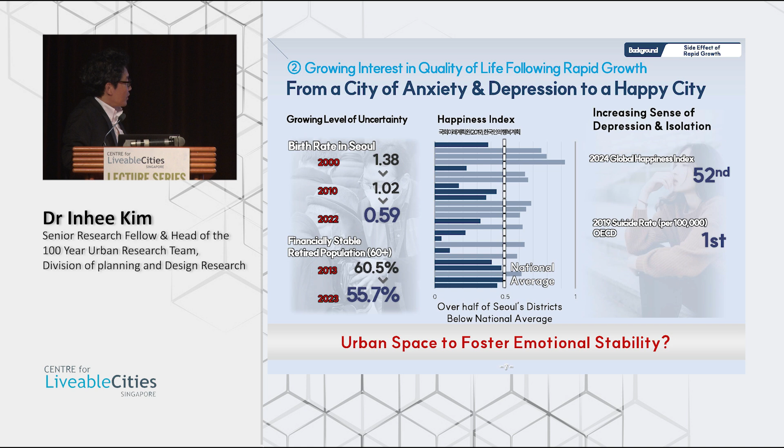The second reason: in the last 100 years, Seoul achieved economic growth and physical improvement, and became one of the global cities. But according to some indicators, since 2019 the suicide rate has been #1 in the world, and this year the Global Happiness Index ranks Seoul 52nd. We are a global city with economic achievement, but the people are not happy. The question is, how can we make citizens happier, and how can we provide space where citizens feel better and have quality of life? That is the second task.

The third reason is globalization, hyper-personalization, and connectivity. Each new generation wants a new lifestyle and wants to enjoy new space. How can we provide for the next generation? That is the third task.

In the last 20 years, when I started making urban master plans for 2020, 2030, 2040, the first step was to learn from advanced cities like Singapore, New York, London, and Tokyo. But after the pandemic, every global city has the same problems and issues, and we don't know what will happen in the future. That's why Seoul also should try to find a solution for ourselves. That is the reason we began the 100-year long-term plan.

We had long-term plans for quality of life and urban competitiveness, but in reality, over the last 50 years we focused on urban development and physical improvement instead of quality of life. We thought quality of life would increase automatically once we achieved global competitiveness, but in fact it didn't happen automatically. That's why we need to change our mindset.

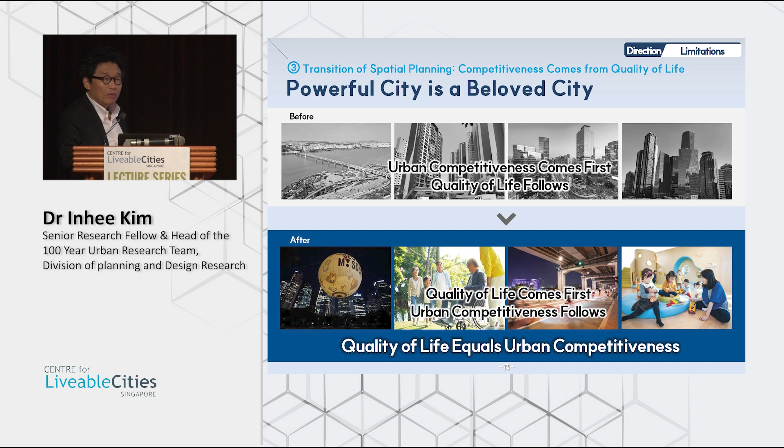Until now, the citizen of Seoul is the people who registered within the Seoul metropolitan boundary. But since 2000, Seoul became bigger and greater. Not only Seoul citizens, but also the people who live outside of Seoul, 8 or 9 million, 40% of the surrounding area, work and study and shop in Seoul metropolitan government. They belong to Seoul metropolitan government, and also the visitors. So that's why we need a new definition of Seoul.

At least, if you as a visitor stay only 1 day in Seoul, you should be considered a Seoul citizen. We need more flexible and inclusive population policies. That is the changing of the citizen.

And second, we didn't have any definition about quality of life. From now on, what is the new quality of life for citizens of Seoul? We should give more space for a generous and relaxed life, and maybe some exciting environment for the citizen. That is the new change idea of 100 years.

In the last 15 years, I had a lot of innovative ideas from citizens, from professionals, from administrators, but almost all the innovative ideas were rejected because of time. It takes a very long time. Because nowadays, the Seoul metropolitan government focuses on the 4-year mayor's period, and sometimes the project extends beyond 4 years, so it gets rejected.

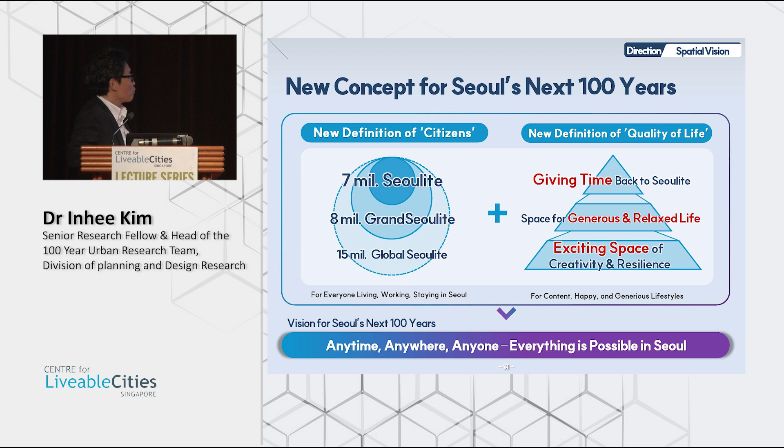Also some ideas that are not within the Seoul metropolitan government, but outside of Seoul, are also rejected because of the system. It's realistic to see it that way, but for our next generation, we need more bold, more creative ideas.

That is the background of the 100-year plan. We try to make a more bold proposal to break our limits of time, space, and systems. That is the background of the 100-year plan.

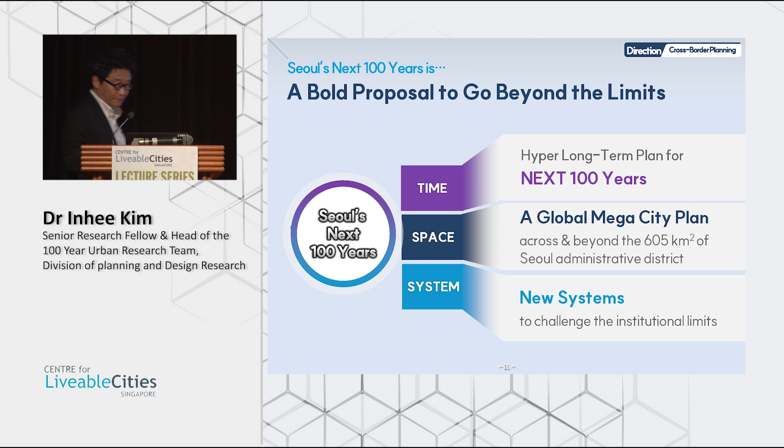So that is our vision house and vision. Next 100 years, city for all, anytime, anywhere, anyone. You can do everything, everything possible in Seoul. That is our vision for the long term.

And then we need 3 goals: nature and human being oriented, and hyperconnectivity. These are the 3 goals, and I will present them briefly. The first one is city in nature.

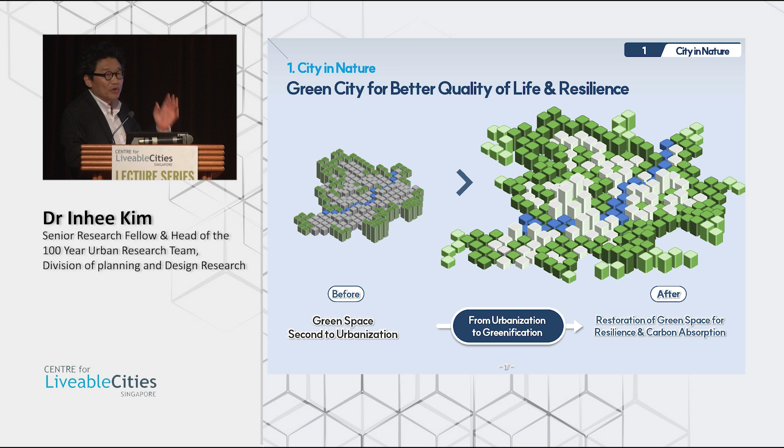In the last 100 years, the environment, the green area, was sacrificed for urbanization. From now on, from urbanization to greenification. How can we realize it? Currently we have about 43% green area of the whole city of Seoul.

From now on, we try to reinvent and redevelop the old infrastructure and old residential areas. Then we can create additional green area, about 47 or 50%. Finally, our goal is about 85 to 86% of the whole city should be green area. That is the first goal.

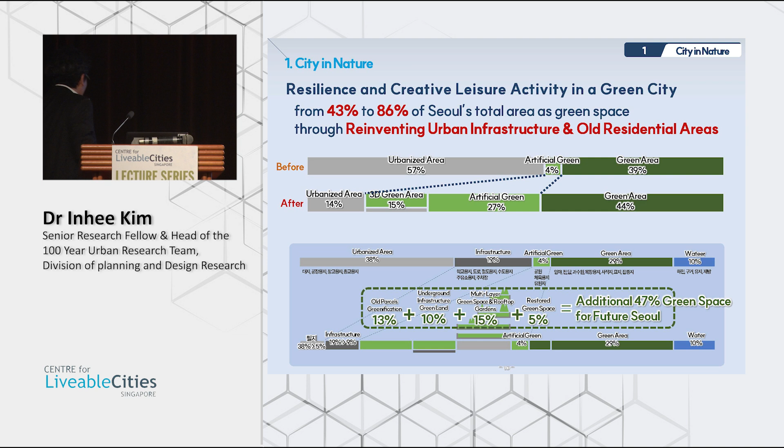And second, Seoul citizens are suffering because of long commute distances, over 30 kilometers, and long commute times, 60 or 90 minutes. We try to change this within micro Seoul. If you imagine working, living, and enjoying where you live within a 15-minute walkable environment, then it's good for quality of life.

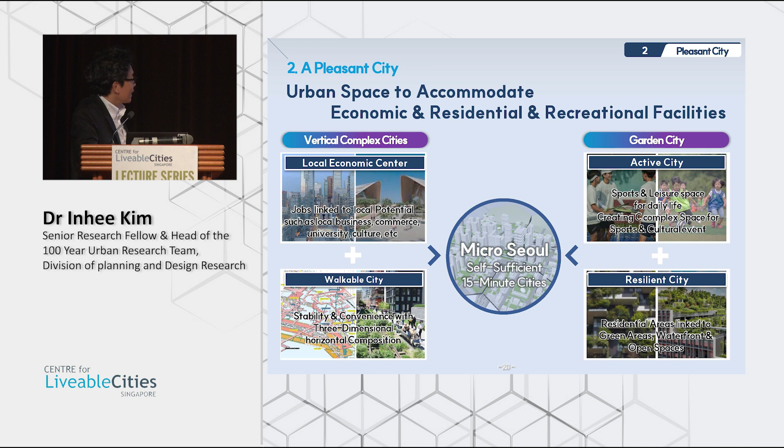That is the idea of micro Seoul. Micro Seoul consists of residential, recreational, and services, and of course the important thing is economic facilities. How can we create economic facilities? That is the most important thing. Anyway, that is the idea of micro Seoul.

And third is connectivity. Nature and micro Seoul are good for daily life, good for citizens. But Seoul is a global city, the capital city. We need more competitiveness and sustainability. That's why we need to connect not only within a neighborhood, but also with major cities in Seoul and in global cities.

We try to improve it: a 15-minute slow and walkable environment, 60 minutes within the country, and between 30 and 45 minutes to the airport to reach global mega cities. That is hyperconnectivity.

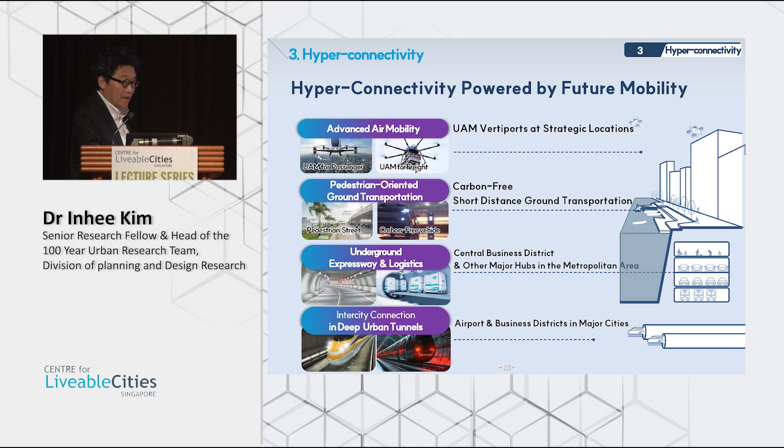We need new hyperconnectivity mobility stations in the air and pedestrian areas. We have a second layer underground, under the expressway and logistics. And under a 40-meter deep tunnel, we have high-speed rail between regional cores. That was the idea, and now just the strategy—how can we realize it?

First, on the nature, the 6 strategic points - this lesson is from Singapore. So the first one is waterfront conversion, restoration of the creeks, rivers and streams.

In Seoul, over 15 or 20% consists of waterfront, but the waterways were covered and used as parks, roads, etc. We remember the most innovative project in 21st century Seoul, the Cheonggyecheon Restoration Project, and we can upgrade further based on that project.

And in all of these places, once the streams and creeks are recovered, we have a better quality of life, and also a local economy boost through this restoration. That is the first one.

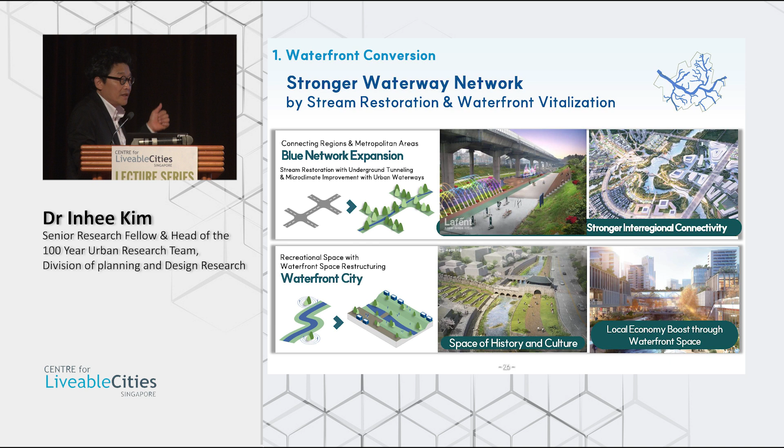15% of Seoul's urbanized area became a green area, and we have over 12 city hubs, city cores. Today I saw the exhibition in Singapore - we also have 10 or 12 city hub projects. That is the advanced lesson from Singapore.

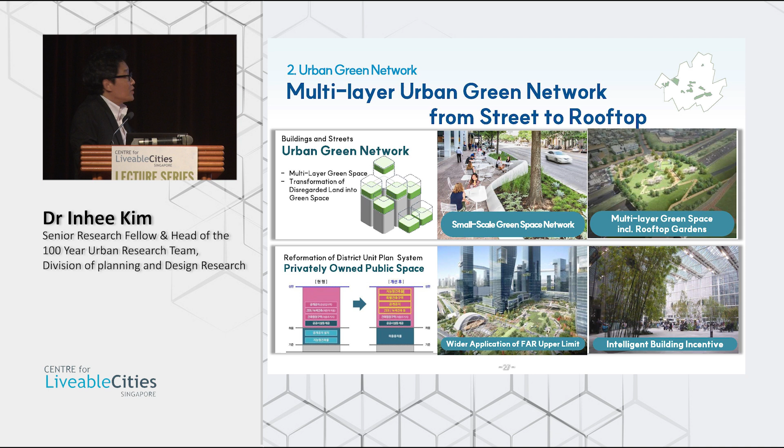And if we develop the city hub, we try to give some 3-dimensional vertical green areas for the districts.

It's important that 35% of urbanized area consists of low-rise residential area, developed in the 1970s. At that time, we didn't have any open places or green spaces. But nowadays, over 60 years later, as it gets older, we should try to renovate this area.

Then we can give, instead of 5 or 10%, over 50% - we create new green areas, like this one. And we have big mega structures: railways, urban expressways, elevated ways, and riverside ways.

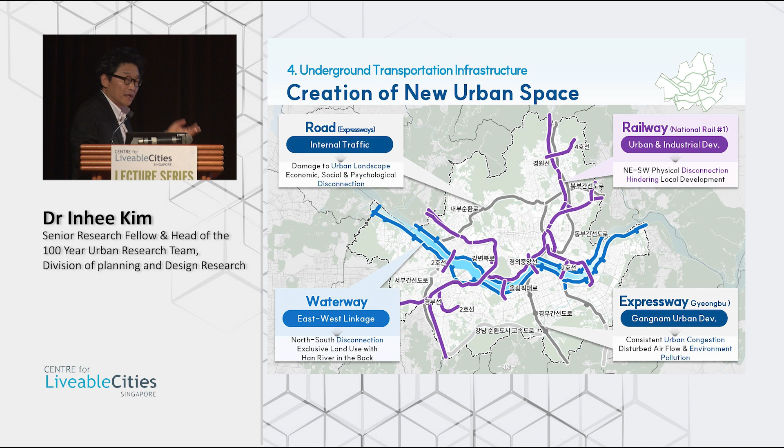All of this big mega infrastructure is getting older, and we can try to put it underground and rearrange this area. Then we create over 20% of our urbanized area as new green, public, and other areas.

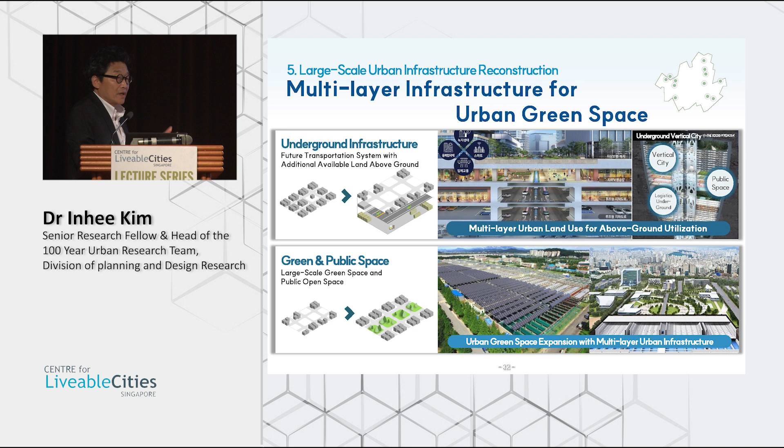Before and after - we also have big mega infrastructure like water storage depots or railway depots. They can also be restructured into urban green areas.

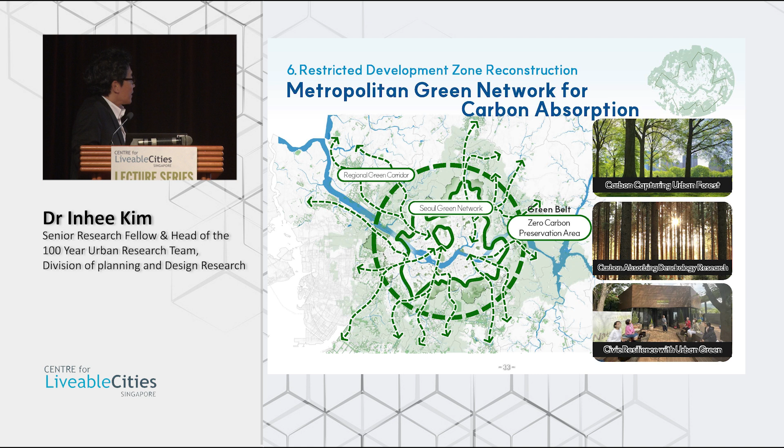Okay, the second point - this is today's issue, micro Seoul. We should change our planning paradigm from facility and function-oriented to activity-oriented and lifestyle-oriented.

That is the idea of self-sufficient, compact micro-cities. Until now, we've focused on the city's soul. We designated the inner city facilities and infrastructure, thinking it would increase global competitiveness and quality of life. But in fact, the quality of life is not realistic. That's why we changed our idea from efficiency-oriented to daily-life, activity-oriented, human-oriented.

As you see here, no matter where you live, you can access work, education, and all daily services within 15 minutes. That could create a good environment for citizens. That is our idea.

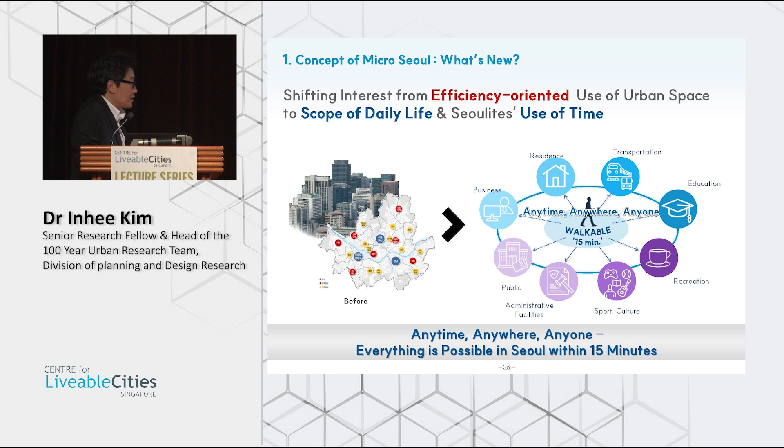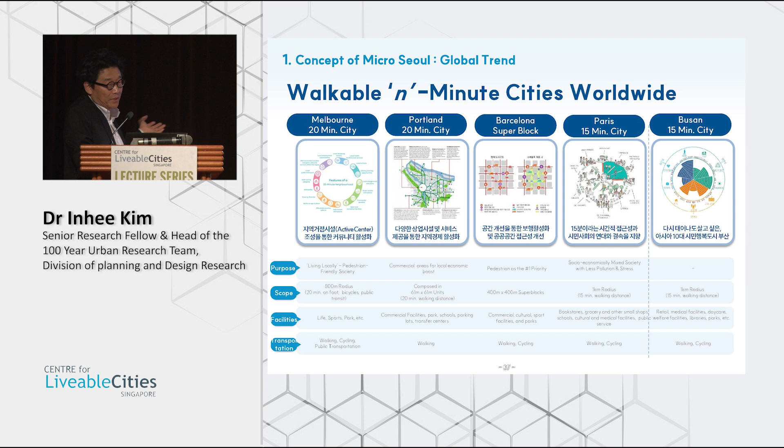And this is not our own creative idea for Seoul. After the pandemic, this became a global trend. Every global city - Melbourne, Portland, Barcelona, Paris - the 15-minute city is a global trend.

Also in Seoul, in the 2040 Seoul Master Plan announced last year, we proposed 116 micro self-sufficiency areas. Over the last year, we discussed how realistic these 116 micro Seoul areas were.

And then we figured out there were too many, and it wasn't enough to make a self-sufficiency area. That's why we changed the number of micro Seoul from 100 to 50 micro Seoul.

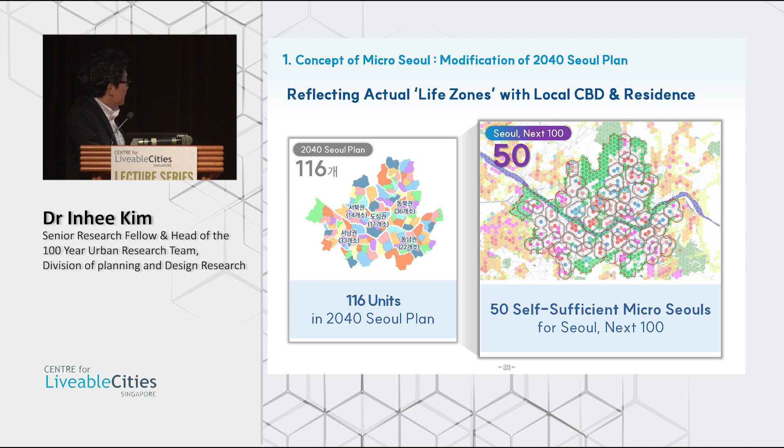How can we analyze it? We divided Seoul into 700 small units, the basic unit with a 1 kilometer diameter, each having basic functions - business core, urban industrial, semi-industrial, commercial, university and R&D, health, administrative, residential, etc. We analyzed land use, density, and facilities across all 700 units.

Then we designated 50 main cores, as you see - that is the 50 main cores of micro Seoul. That is the result of the last year's work. And how can we...

Arrange micro Seoul? As I mentioned, we have 700 units with a 1 kilometer diameter - that is a 15 minute walking distance. We call it 동네 (dongne) in Korean, meaning neighborhood unit, with a population of about 20,000. Each unit has a main function, like residential, cultural, educational, commercial, or business.

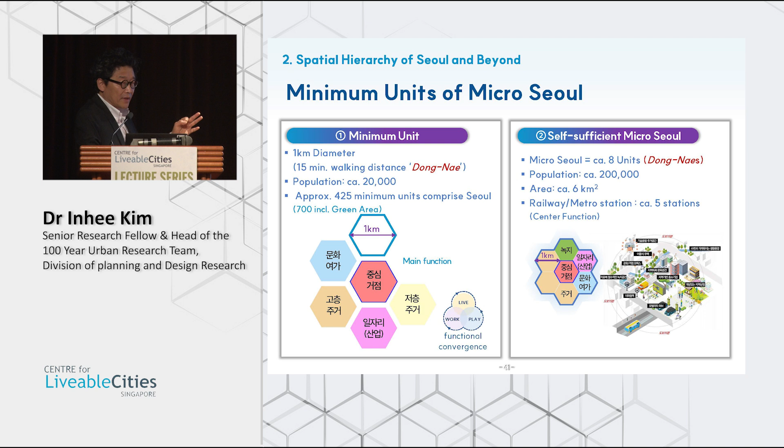About 8 of these minimum units, the 동네, come together to create one micro self-sufficient city - about 8 units, giving a population of 200,000. That population is enough to make a self-sufficient city, with about 4 or 5 city centers, or cores. That is very important - it creates jobs. That is the second level.

And the third level - 50 micro Seouls then come together to form one Seoul metropolitan government, with over 10 million population. But that is not enough.

Because surrounding area, we have 11 surrounding cities with 8 million population. 40% of that 8 million population work and study together within the Seoul metropolitan government. That's why we should extend our idea of micro Seoul, not only in Seoul metropolitan government, but also outside of Seoul. So altogether 15 million population with 80 micro Seoul, micro cities.

That means we need a new governance and a new planning system, a new planning structure. That is our next task, and it's not finished yet.

Then the next level, all the country, in Korea we have 51 million population. Until now we have about 9 provinces and 6 mega cities like Seoul, Incheon, Busan, Gwangju, etc. Until now they have their own plan, and it is not enough to react to future cities in an old-fashioned way. That's why we should try to divide all the country instead into 16 megacity provinces, into 4 megacity regions, including Seoul.

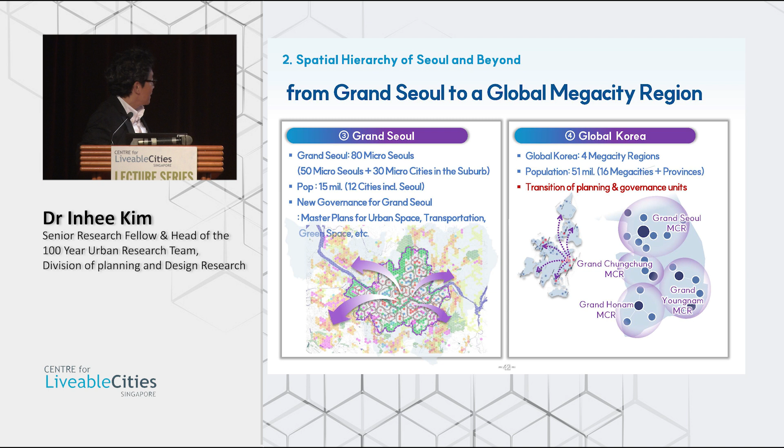The main task, how can we realize it, is how can we prepare job opportunities. That is very important, because in the city center, CBD is no problem, but periphery is not easy to create a job. And then, at first, the urban design shifts from parcel oriented to area oriented.

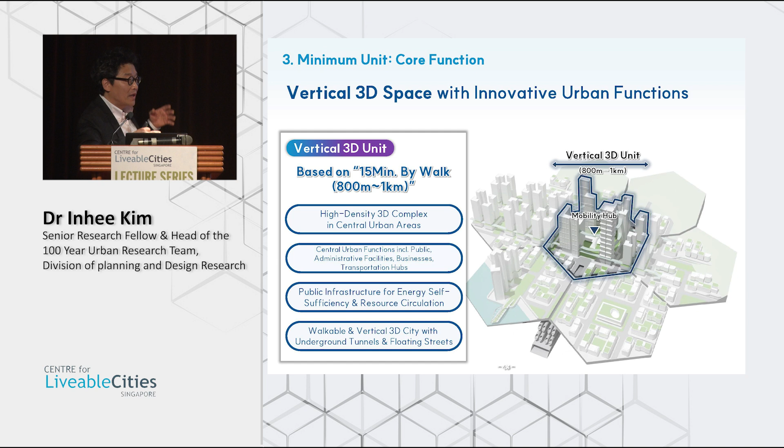So 800 meters or 1 kilometer long, we really try to make a city in the city, and in ground or in the air, public and private, and residential, commercial — every function can gather together. And then important is the underground. Underground we have energy storage systems and water disposal. The first layer has subway logistics, and the second layer has high-speed rail. All of this is a new structure.

But it's easy to design this urban structure. What's important is how can we fill the contents of the building.

That is the idea. And then luckily, in the last 30 years, the spatial structure of Seoul developed from one city core to polycentral. Now we have 3 CBDs, 7 mega cores, and 12 local cores. That is the main structure, so about 20 cores work as job opportunity centers, and 50 local district centers. Altogether we have about 80 big or small size job opportunity cores, plus about 50 universities.

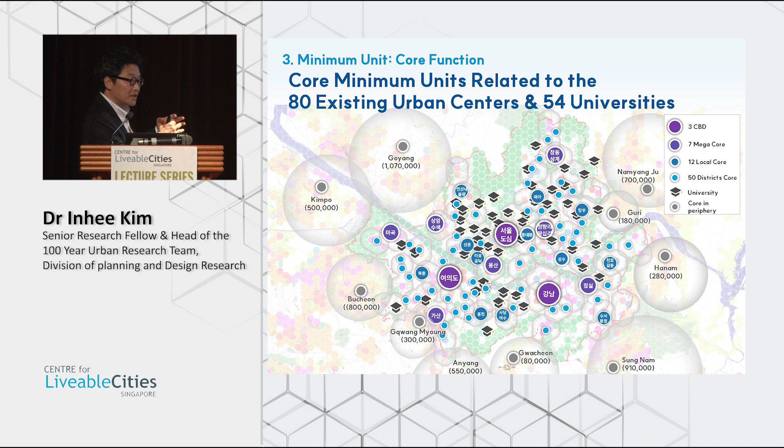Until now, the role of the university has not been so effective. But from now on we try to improve the role of the university, because the university has potential in the future as a startup innovative hub. And then we can try to combine the university and the city center core. That is our idea, and that is the main first step to make a micro Seoul.

And realistically, the 50 micro Seoul cannot be promoted at once. Of course it is not easy. That's why, step by step, here I have 4 case studies which have potential — ongoing projects that we can try to rearrange.

The first case study connects campus town, university, and TOD, transit-oriented development. This case is located in the northern part of Seoul, in the periphery, and Gwang-Woon University has a lot of potential for startup IT etc., but they need more places and spaces to make a startup, and they couldn't find it within the university.

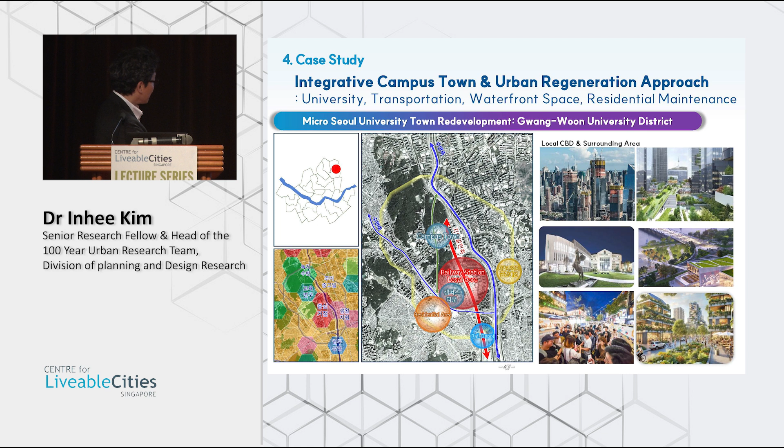Near the campus town we have a big transit-oriented development. They have big spaces but they don't have any contents. We can try to combine the university and the TOD transit. And then in the surrounding area we have old residential area and waterfront, etc. We can try to combine such ideas.

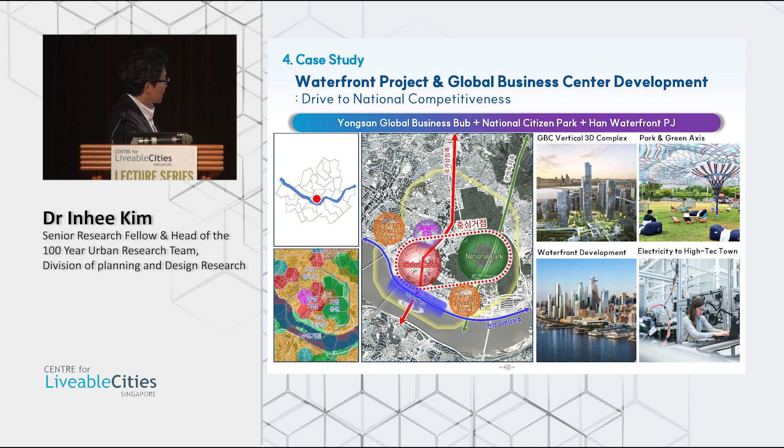That is the size of micro Seoul, within a 200,000 population. Then we can try to call a comprehensive plan for each area — global mega cities and Yongsan global business hub with national park, and also the innovative semi-industry park, altogether with a waterfront project. It is an old residential area, over 40 years old, and it should be renovated. Without micro Seoul, the residential area will be renovated as a new apartment, with just residential function. But in micro Seoul, maybe 70% residential and 30% for commercial and city function, combined with a high-tech R&D center located near the residential area on the waterfront.

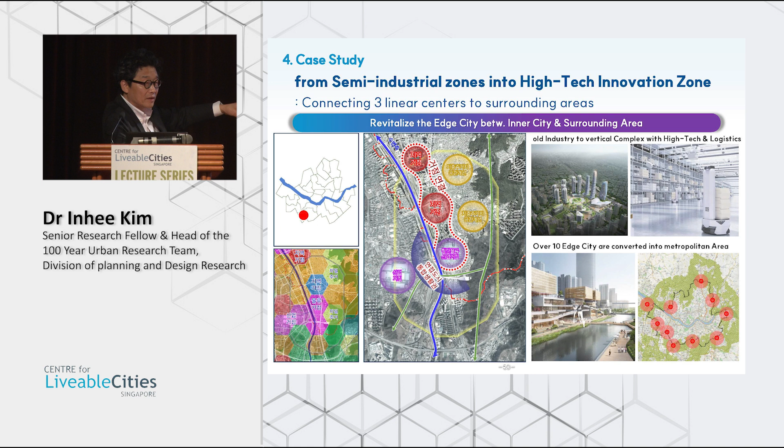And finally, as you see here, we have about 10 big hubs located between Seoul's periphery and surrounding area. If we make some core here, then people who live outside of Seoul don't need to come to the inner city. They can work in the edge city. That is also an idea of micro cities.

So finally, how can we become a competitive city worldwide? We need a new connectivity, and as you see, we changed the spatial structure, instead of 3, 7, and 12 local centers.

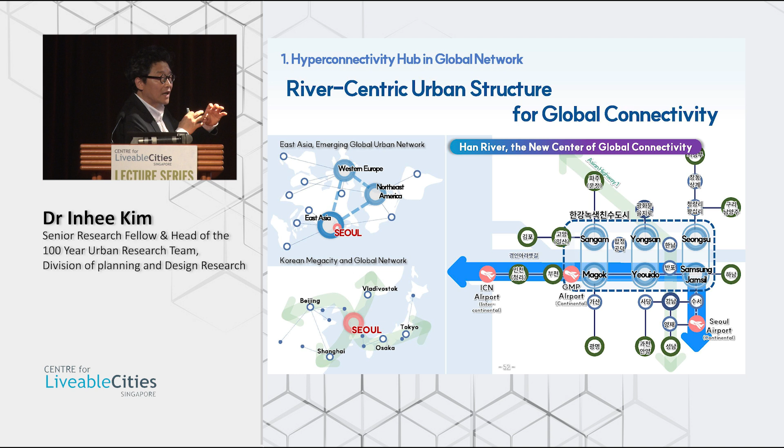In the future, I think the Han River waterfront project is very important. Nowadays, 8 important hubs are concentrated along the Han River, and we try to make a spatial structure in front of the Han River with a new transportation system. That is an idea.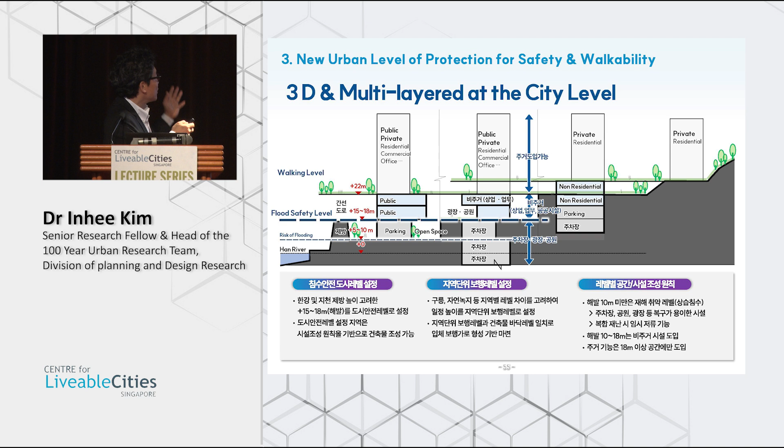And this is an idea of where you live, and how you can get fast and safely to the inner cities, to the countryside, and to the airport. So that is our strategy.

And finally, the next step: the beginning of the 100-year plan. Of course, we need that idea, and the idea should be improved through workshops, through global workshops.

Then the second step: we need a new governance, a new planning system, and a new institutional role. That is the strategic institution. That could be our next step.

The Seoul Metropolitan Government has prepared such a phase 2 for next year. We need a new governance, and we also need a global forum and workshop, identification and design forum. We need to share this idea with citizens and professionals, etc.

And finally, the goal of the 100-year plan is not just to show the strategy, but to try to begin with the citizens for the next 100 years. That is our first step, and that's why we need a global partnership, not only with Seoul citizens, but also globally with different major urban planning and architecture experts, etc.

I think we discussed the 100-year plan at the last Mayor Forum Summit, the World Summit in Singapore in June. I think the Lee Kuan Yew network is one important partnership, and we can start to discuss for our better cities.

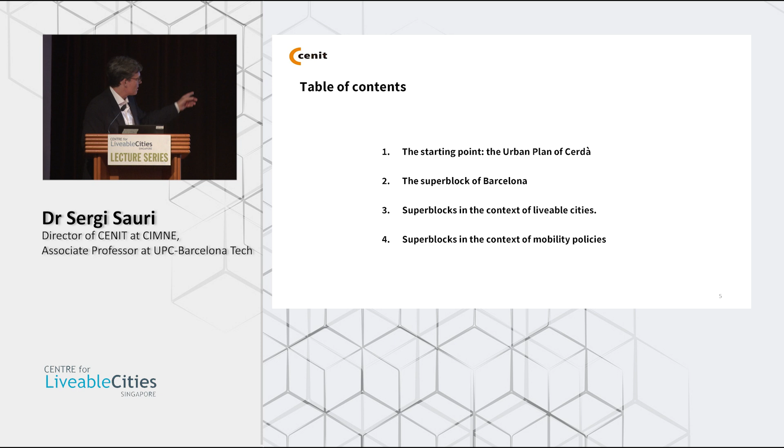No, I was thinking more just to move a little bit. So later we talk about the concept of the Superblock initiative. You will see we have switched a little bit the scope, the approach. Later we talk in the context of livable cities, and later in the context of mobility policies. Thanks a lot, okay.

So let's start with the starting point, the urban plan of Cerdà. This is Barcelona, the grid structure. So many cities are like this, it's not something very strange around the world to find this kind of initiative. But this is more what we have. This morphology, when initially this structure was created, was based on some needs of the city.

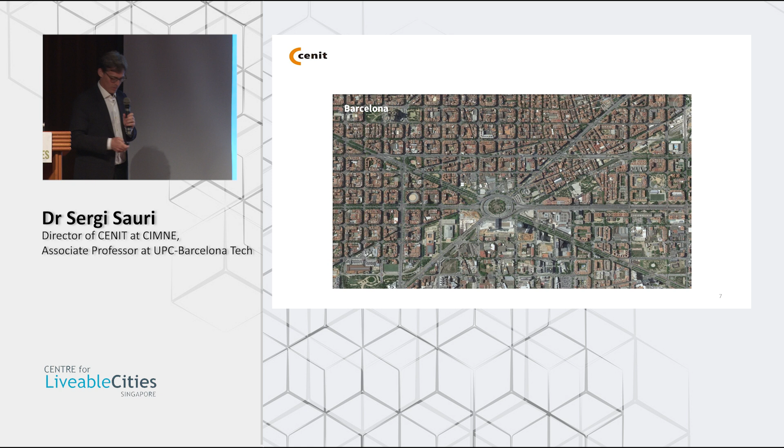Initially, this is Barcelona before Plan Cerdà. This part here was the old medieval walls, and the city was completely isolated. Imagine we're talking about the 19th century, the beginning of the industrial revolution, so many people from the countryside of Barcelona were coming to the city for new jobs, usually related to industry at that moment. So here was completely crowded with people.

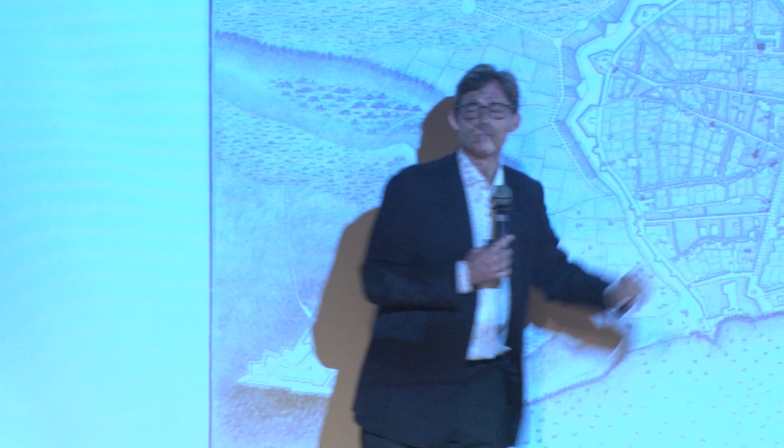The city was not able to expand because physically, with all these situations, it was difficult to grow. In addition to that, there was no potable water, no sewage system, no sanitation infrastructure. So you can imagine the conditions in the city: high population and poor hygienic conditions. Sounds like the pandemics we have, no?

So just some data to figure out what the situation was. The average life expectancy was 36 years old, only for the rich people. If you were poor people or an employee, it was 23 years old. In addition, in '34, '54, and '65 we had cholera.

So imagine, this was the starting point of the planning. The government, in that moment the central government, decided we need to expand Barcelona, to remove the medieval age constraints and to expand. This was very interesting when the Plan Cerdà arrived, because it was approved by the central government, and in fact the city hall was against this plan. They had another vision. In fact it was very controversial.

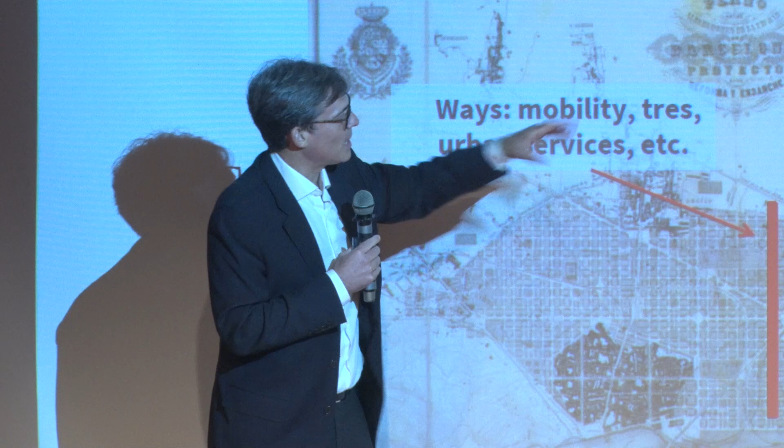So you realize the structure of the original plan, this grid structure. Basically, the conception of Cerdà was that the territory was made by two main things. One is ways: this was for mobility, for urban services, for trees, for urban space, a place for connection, for connecting people to be together. And between these ways, we have places, more thought for private space.

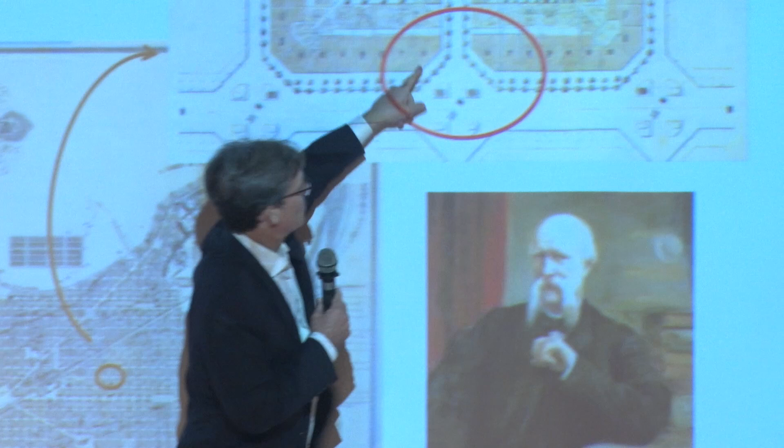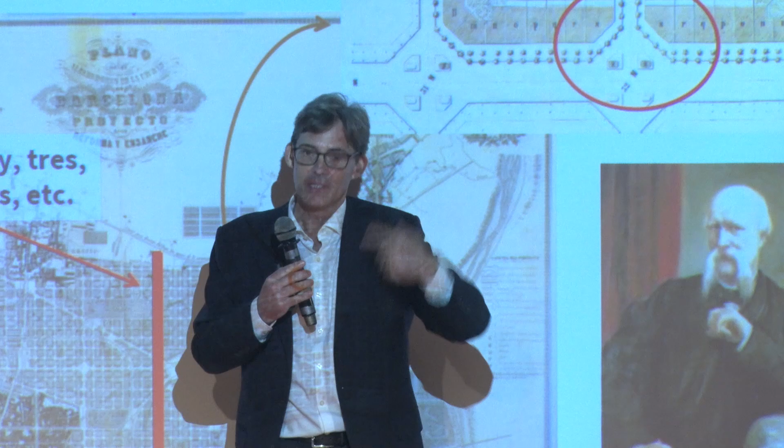It's another interesting thing, maybe very typical, this concept of the 45 degree angle, what in Catalan we call 'xamfrà' - I know it's difficult to pronounce. It's very typical from there. This was thought to be very novel at the time. This kind of structure you can see in so many cities, but this concept was new and was thought to improve visibility, because they were thinking about the future, the cars. We're thinking about the industrial revolution, so Cerdà was envisioning that in the future there would be cars, so the city should be prepared for mobility.

So what's the concept of this? We're thinking about not just this structure, but in fact this design of the city was very focused on the needs of the people. Why was the city hall against this? Especially the bourgeoisie was against this, because in some way it was thinking more about the poor, to solve the poor conditions of the citizens, the employees of the factories. So all the design was thinking about the needs of the people.

So what are these needs, for instance? Maybe it's very clear when we go back to this specific design - we'll see in more detail. This concept was thinking, okay, let's have the housing here, and in the middle will be gardens, parks, so people can reproduce the conditions they had in the countryside.

Usually the houses were designed in such a way that they have natural light, but also ventilation, thinking about sanitation, thinking about the cholera, this epidemic. So this was important to think about. Even all the details about the size were thinking about the people - for instance, in the old times, people were carrying the water, so they were thinking the height of the building would be enough that people could manage bringing the water up.

These kind of designs—another aspect was the width of the streets, 20, 30, or 50 meters depending. It's pretty wide when you see the designs at that time, because they were thinking about the future of mobility.

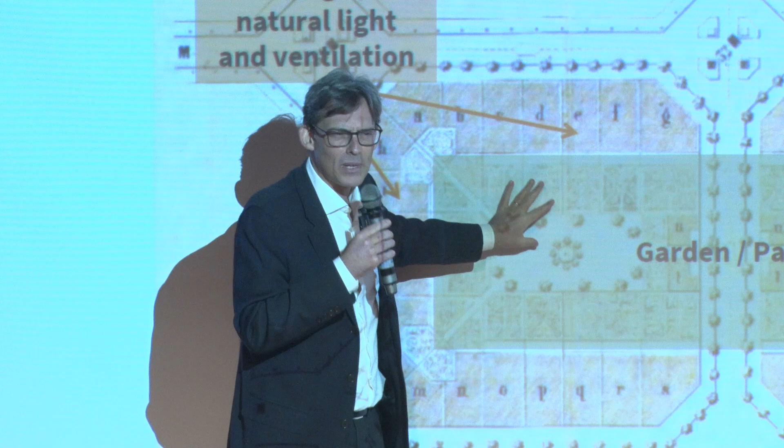What is normal is that you will see this occupied by buildings, instead of being 16 meters maximum height, twice that in practice. Some places still have parks, and even one place has a swimming pool, and they're really crowded.

But this is not what we have today. You can imagine the city hall was against that, so at the end of the day the regulations, the planning, the development of the 60s and 70s, and the speculation of the real estate market made these plans very difficult to move forward in practice. So it was not the case.

So these concepts give priority to people, also thinking about circulation—circulating from the housing—and the concerns of mobility, as I already told you. So this was the starting point.

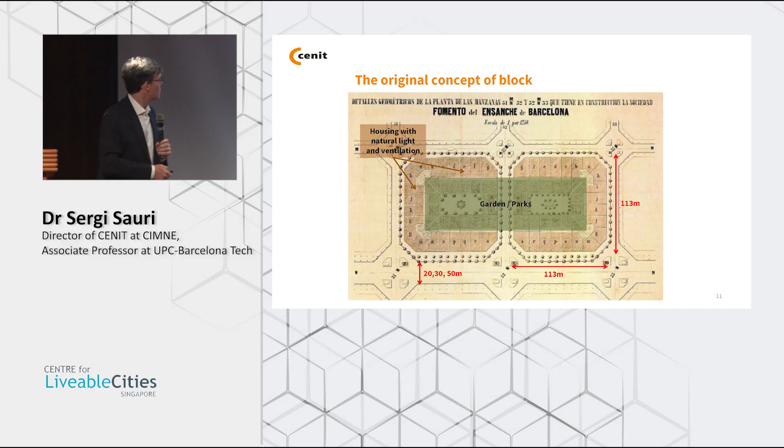When you go back, one of the ideas that was very challenging with Cerdà—and I'm repeating this part of the history because you'll see later the Superblocks fit with this, it's a consequence of this philosophy—is, with the current situation, to ruralize the urban and urbanize the rural. So the idea is a balance between urban values—connectivity, meeting people, sharing knowledge, getting more knowledge—with the rural advantage.

Me, for instance, I come from a village, so you have the rural advantage: the trees, the nature, some peace, no noise. People from villages really appreciate that a lot when they move to a city. Cerdà also came from a village, so they envisioned this way of designing the city.

So Barcelona's original plan was thinking about the needs of human scale. It was not a city thinking in monuments, not a city thinking about big things to impress people, but a city thinking about how citizens can live in a proper way there. That was the old design.

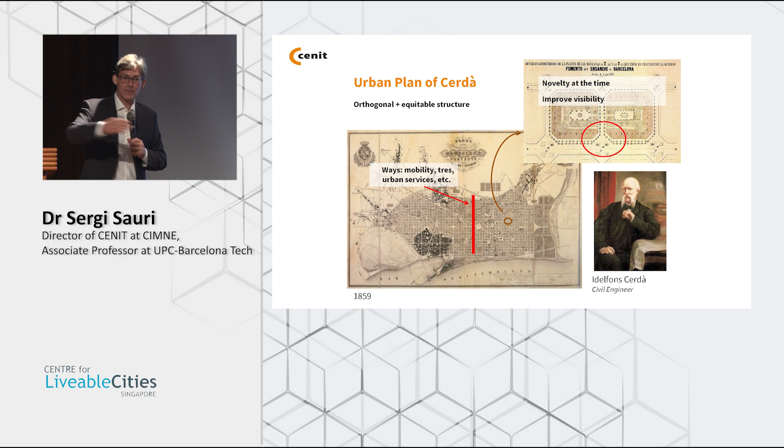What happens in practice? Well, in practice they started developing things, they occupied all the blocks completely. And of course, this is the situation we have today: a huge amount of pollution.

In addition to that, one of the reasons Barcelona is so polluted, aside from the traffic like in many cities, is that the density is really high. On top of that, we're surrounded by mountains, which makes the expansion of the city almost impossible. So the end result is we have a lot of pollution.

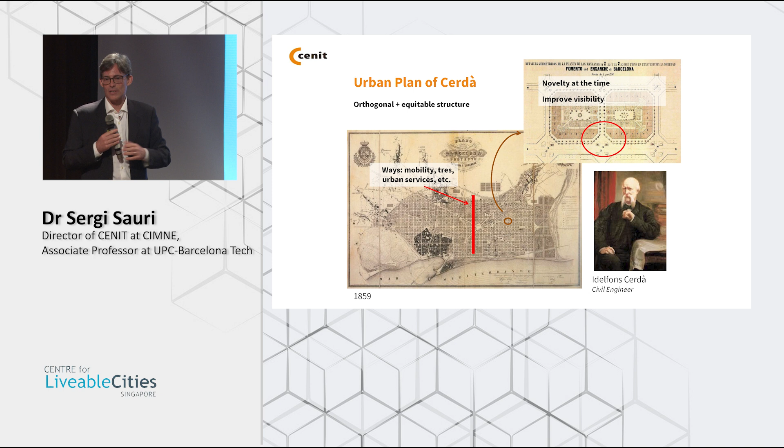It's like we need to rethink. So the mobility policies are a big issue, but one of the big issues is also, of course, the idea of superblocks. Keep in mind this original idea, because this is what we're thinking about when we discuss the superblocks.

So now all of this is occupied completely, so the only way to put in green area is outside. Since inside was not possible, let's go outside. And this is the starting point of the superblocks.

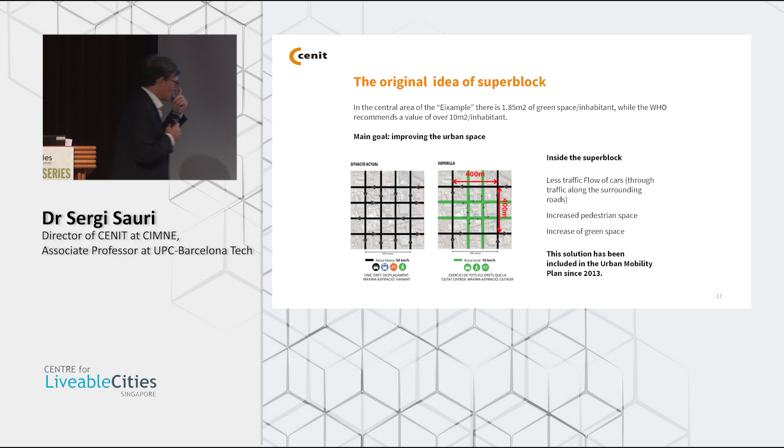So the original idea, when it was created—now they've changed it a little bit, we'll talk about that—was thinking about this grid structure with all the traffic. Usually the limit is 50 kilometers per hour, but in practice it depends; when there's not so much traffic, people of course go faster.

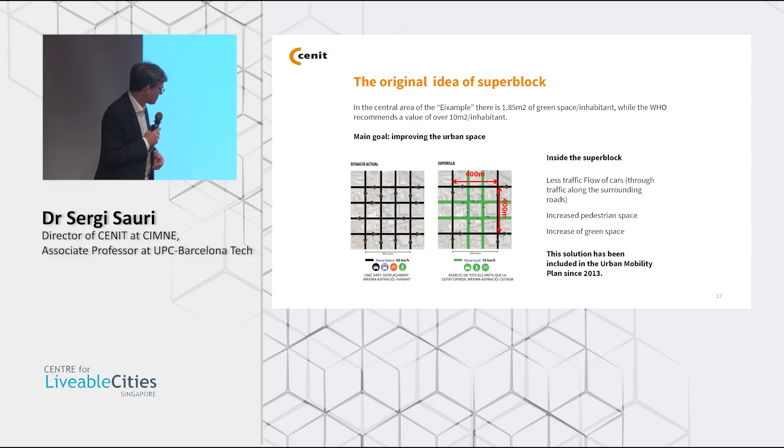You have public space, private cars, bikes, pedestrians. Sometimes it's really dense, the space. Driving in Barcelona is really challenging sometimes. In the central area of l'Eixample, with its grid structure, we only have 1.85 square meters of green space per inhabitant, when the recommendation is more than 10. There's a real need for green space.

This is more a personal anecdote, but during the pandemic, at some point we were only allowed to leave our apartments within 1 kilometer. In that 1 kilometer, where I was living in the center of Barcelona, there was no green space. Impossible to find anything.

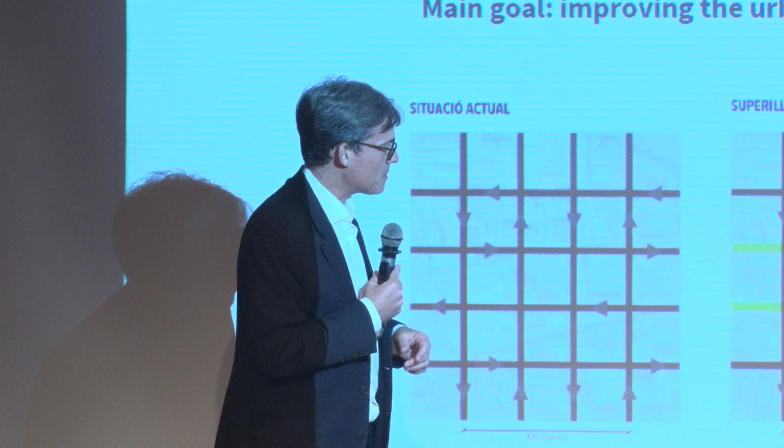So the idea is to expand what we have outward. Originally, we thought about grouping together about 9 blocks, 400 meters by 400 meters, and creating an area restricted to cars, only for citizens, because when you have cars it's impossible not to remove some of them and promote bikes and pedestrian space. So there will be much less traffic here.

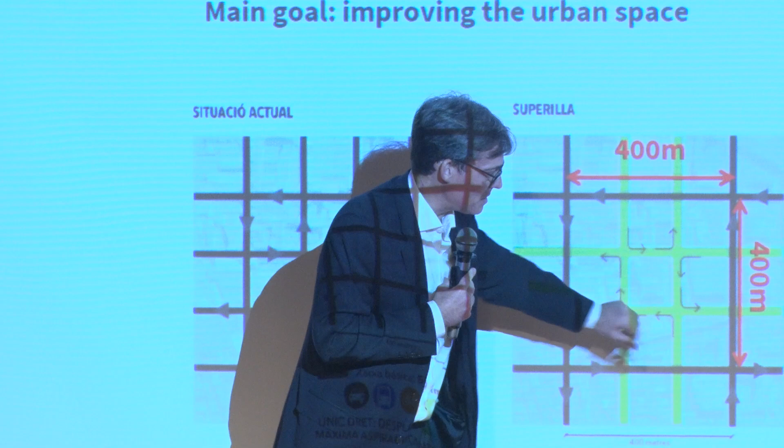The design of the urban space is really important, and the rest of the traffic goes through the main roads, increasing pedestrian space and green area. This solution has been conceived as part of the mobility urban plan. Since 2013, every 5 years we've done a sustainable urban mobility plan, and it's included as part of the measures. We'll later reflect on how these measures fit into our mobility policies - it's an important step moving forward.

So maybe here it's more a detail about this idea of the model. When we're thinking about pedestrian areas, we need to think about all the consequences they have. It's not easy, the expansion.

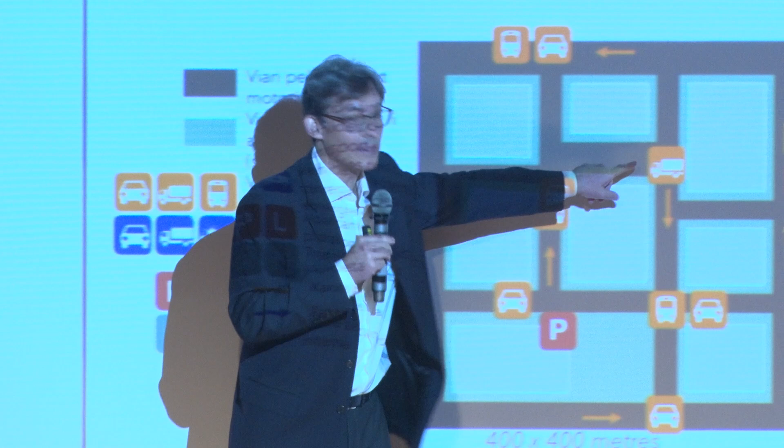We have this model with cars, urban freight distribution - very important, especially now, after the pandemic, e-commerce is growing a lot everywhere in the world. Imagine the problem: you have more and more trucks around the city. So how do we manage this?

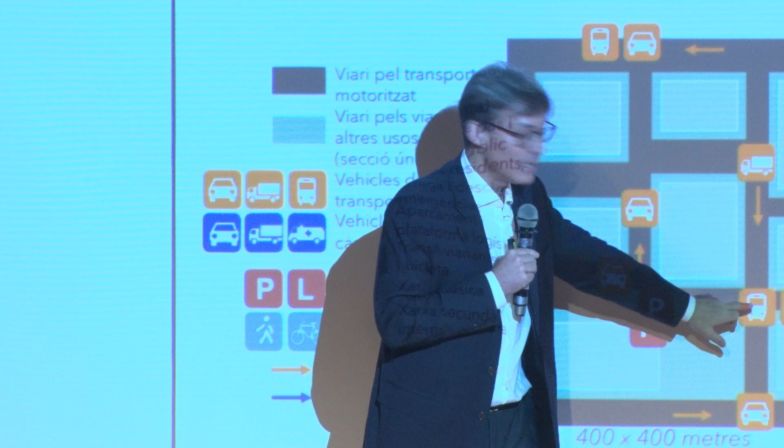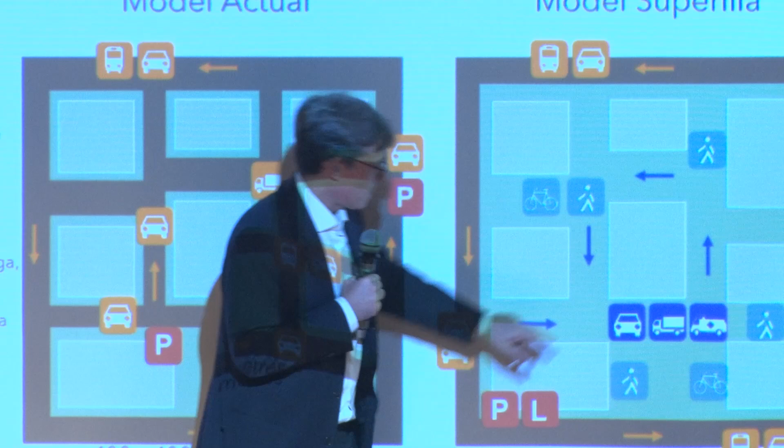We have parking, the bus network - so when you have this solution, it affects the bus network, which is important. You switch to a greener model, but you need to think about how to provide service to the neighbors' cars, urban freight distribution, or even services like ambulances.

There are some interesting initiatives about urban freight distribution, like micro depots - you create a small storage area where big trucks deliver, and later cargo bikes make the last mile delivery. At the end of the day, we're testing solutions that fit well with this idea. That's the main idea of this project.

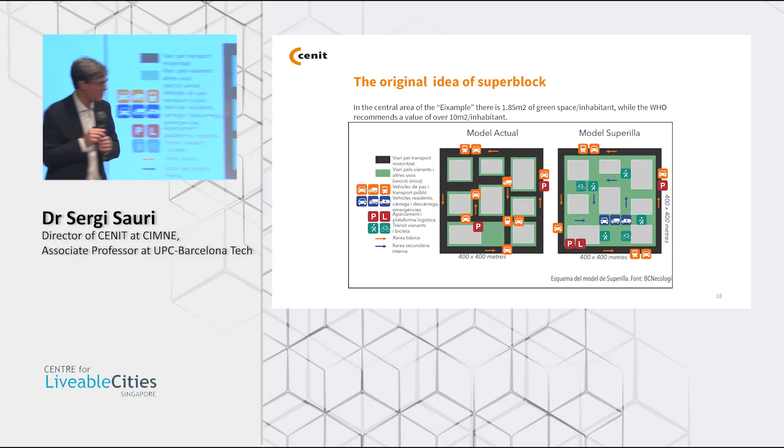When we started, we began with a pilot case - the famous case of Poblenou, the 22@ district, which some of you may be familiar with. It was very controversial because at first it was not very residential, more for workshops, like a technological district, so at the beginning citizens weren't able to enjoy it so much. Later, over the years, more people came to live there.

One of the more controversial things was the design - you can see it wasn't very refined, just painted, we put in urban space, in a way what we now call tactical urbanism. That was the next step, but at the beginning it was the way to start this initiative. It was controversial because it wasn't easy - city engagement was important. Some people didn't understand well and complained about the traffic. You can imagine, every initiative you put in urban space is difficult, but it was the starting point. There were lessons learned, sometimes from mistakes, sometimes from good solutions, and that led to the next step.

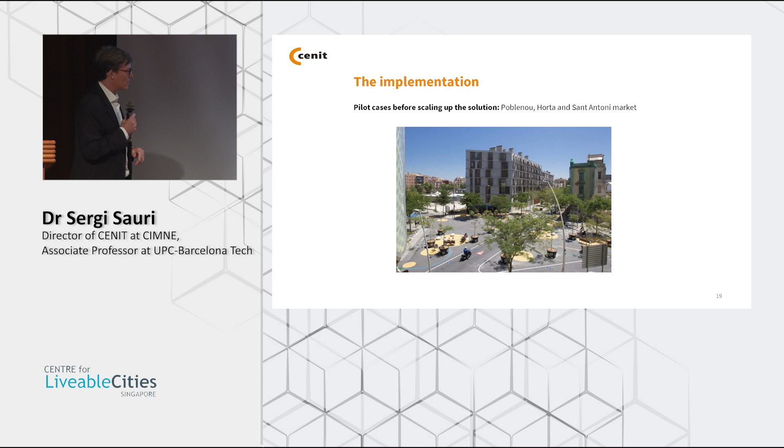Another example was in Sant Antoni Market - very interesting, this is a more recent one. Imagine this was an old market area, all of it was for driving, so suddenly you make everything pedestrian, add some parts, and create a very nice atmosphere. Even during the weekends there's a lot of activity - kids charging around on scooters, and a lot of other things, so it's a good quality space.

Even second-hand books - here, for instance, there are places for second-hand books. So you see, there's a lot of life around there. It's a quality space - some people are at the bar, some are not. It's relaxing.

They transform, they make a big change. This initiative was a very good lesson, a very good result.

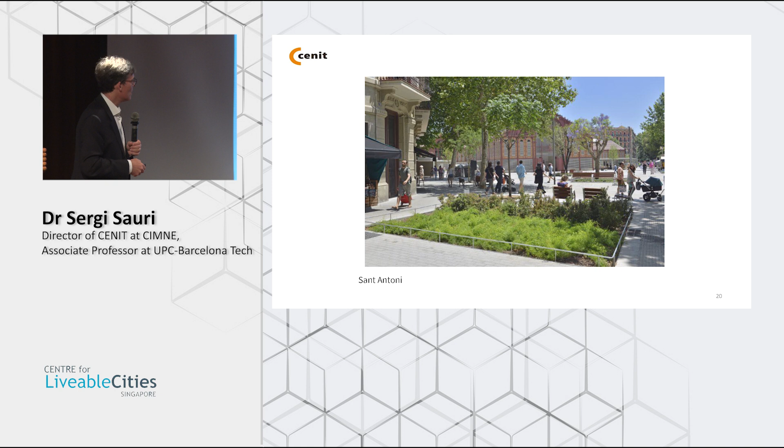So later, here for instance, we make an analysis. It's something we'll present more tomorrow. We are doing current ongoing research with the Centre for Liveable Cities and CENIT about providing a tool to make an assessment of this kind of initiative.

Every time the governments are really concerned about how to implement this, because at the end of the day it affects a lot of aspects. It affects the economic aspects, the commerce we have there. It's very likely some stores will benefit from these initiatives, but others may see a change. A restaurant will benefit, no doubt. Others will find it more difficult.

The mobility patterns will change, of course - that's an important effect. Environmental issues - they reduce the pollution, they reduce the noise in that area, and there are effects on the social and health situations.

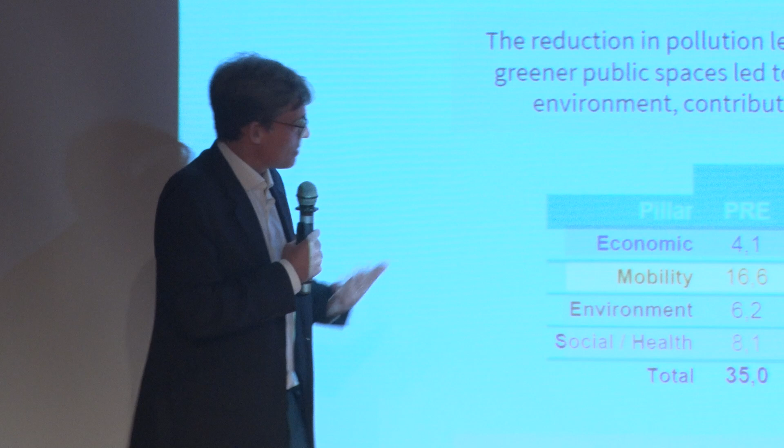So basically this is just an overview, but some interesting comments. Regarding the pollution level, talking with environmental experts, they give good spaces, so they make a good contribution in this way - again they reduce the pollution, they help with the noise also. And the traffic calming was also positive, because they reduce a lot of the traffic in the area. Again, what is the challenge to expand this solution to a bigger scale in the city?

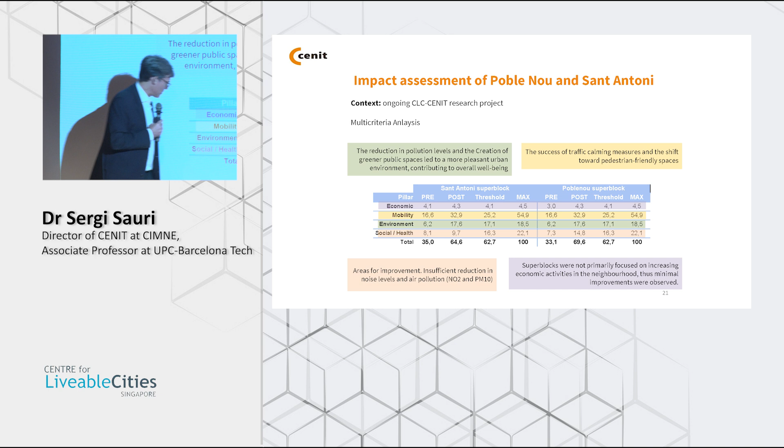When we go to, for instance, improvement in social terms, the noise was not very good - these were the levels. Sorry, I said before it was more the pollution - the air pollution level. Here it's more a mix with the urban space of good quality. In terms of pollution and noise, there was some improvement, but it was not very good.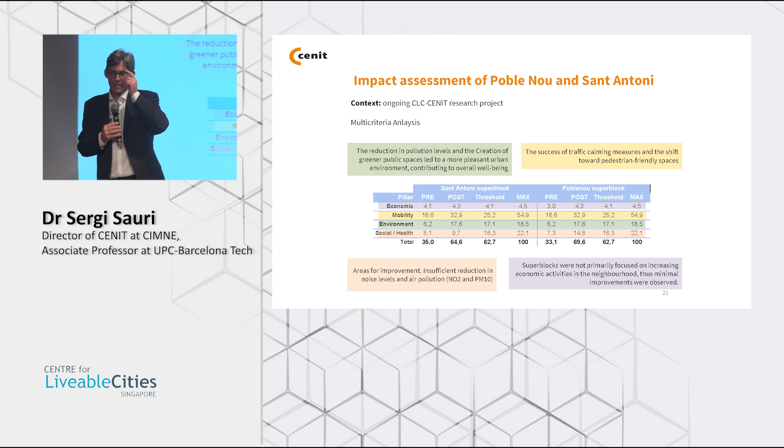And also the economical way - the results were not increased so much. The economical aspect was not the main purpose, but it didn't increase so much either.

So now they're doing a new analysis, the City Hall. I think it's the next one, with more detail, and we'll have new data very soon about what happens in the long term.

Also, another thing is the value of the real estate sector - it's very likely they will increase. So it's still an ongoing research we're doing. Next year it will be published.

So what happens? The problem is increasing this solution at a bigger scale. Imagine you have this in Barcelona, but you start putting a lot of them. In fact, we submitted research during the City Summit this last June that showed that if you expand this solution to a bigger scale, if there is the possibility, it's some kind of trade-off.

The people living here inside have a very good quality of life. But if you don't reduce the traffic, the people outside the Superblock really have a very bad quality of life. So even the end result can be, from the perspective of cost-benefit analysis, even negative. So it's very important to address this with mobility policy measures properly.

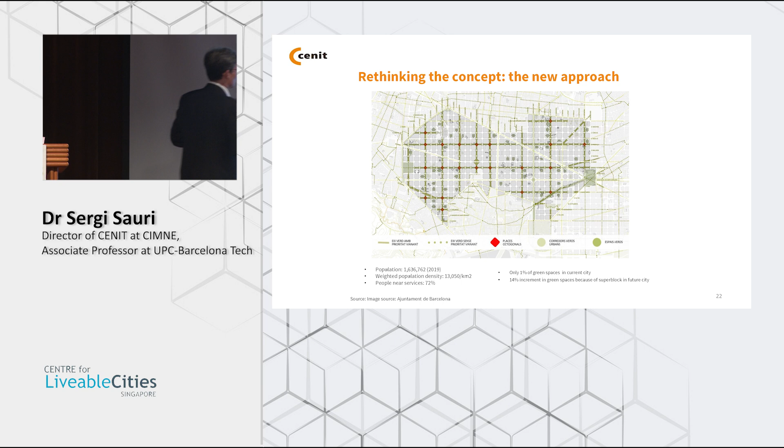So the City Hall was concerned about that, so they changed the approach a little bit. The idea is, okay, let's forget about the Superblock and let's talk about solving this with green spaces, but more in terms of lines. In Catalan we say 'eixos verds' - green ways, we can say.

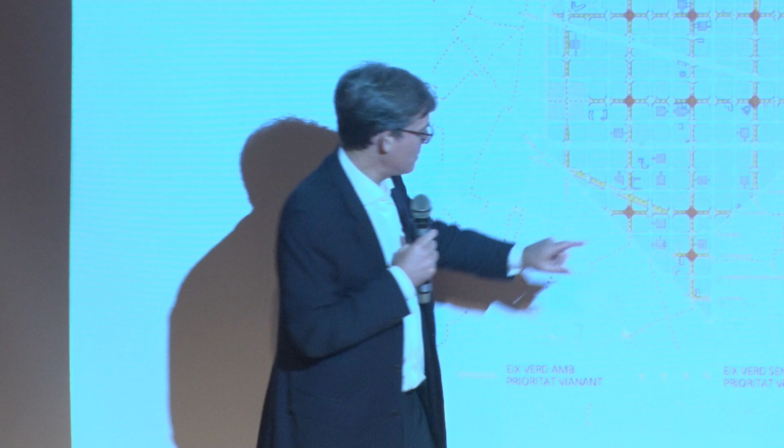So basically we have this - we'll see an example of what is the idea behind that - and also we have the squares, and all this green space. This is the final picture that the city hall would like to have.

But of course it's challenging how to implement this, in terms of thinking about, for instance, the bus network - how to implement this. The traffic, we need to reduce the traffic. What is the problem of the traffic in Barcelona? We need to improve the metropolitan mobility, the commuter train. So when you're thinking about this, you need to think also at a bigger scale, the metropolitan scale.

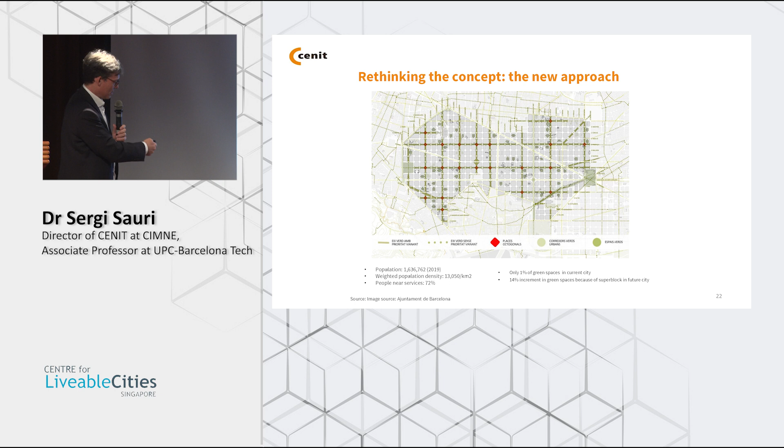Also it's challenging there. The idea of this axis is to get this kind of design when you go to the green streets. As you can realize, we increase the green a little bit, but we need to be aware this isn't the weather of Singapore, so we cannot put so much green. We need to be careful because often we have problems with water, unfortunately. I really love here, all the green, but unfortunately we cannot do so much with the weather. But this is the idea.

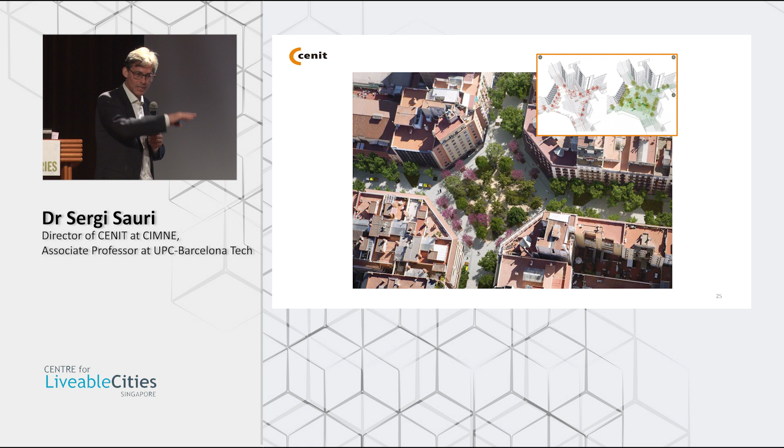For instance, this is another project, another idea about this picture. Now we'll see some real examples, but this shows the several types of streets they are planning to do. And here, for instance, will be the squares. This L'Eixample grid, as we said, is at 45 degrees, so it ends up something like this. These are the squares. This is the final vision we have for the city.

So here, exactly, you see another example of the possible, how it was before and what was planned to do in the future, in this vision. So, again, sorry, let me check the timing.

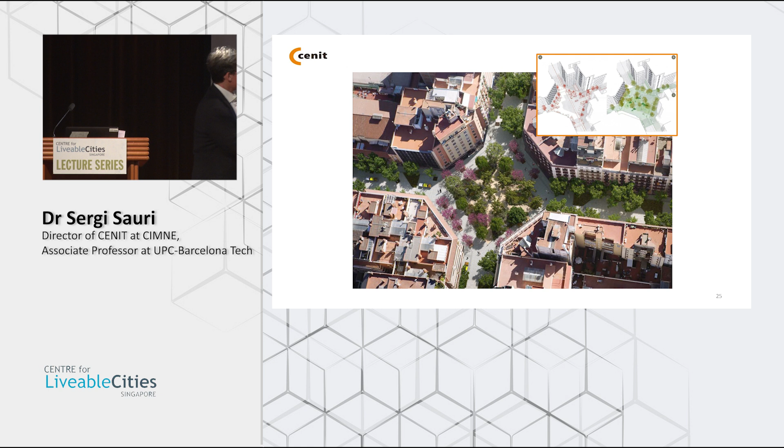So this is the idea we would like to expand. In some way, we started with something. The previous government—we switched governments last year—was very determined with this, very determined. So going forward, they started in '22 with some corridors. It's one you have here. You can consider Consell de Cent Street, all of these. Soon we'll have all the data about before the implementation and the final implementation, some indicators. We'll see now in a slide what indicator we are measuring.

But this one, going to the street, seems very successful, to be honest. You see a lot of life there. Later we'll see the details—we'll have to be critical about things—but in fact, this is what they're starting.

Another important thing I would like to point out is there's no political consensus with this project. The political parties from the left side of the City Hall like the idea, they envision this as the future, but they don't agree on how to implement it. Some political parties, like in the previous measure, think there has to be strong, determined implementation. The current government is more cautious about that because they are a coalition.

Usually, for instance, the business association is very cautious, because they are worried that with no cars there will be no business. It's a lot of this in mind, so usually they are very worried about that. So the current government is more cautious about how to implement this, how fast they can go. But the vision they have in the long term is like this.

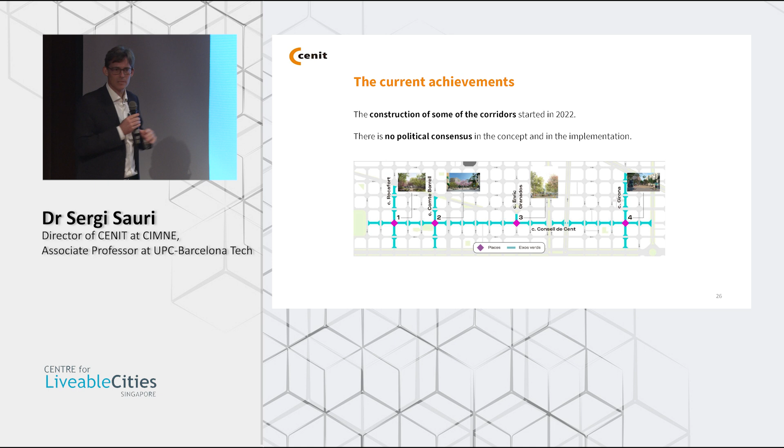This is what we want Barcelona to be like. Some pictures about the current situation: you can see when you start implementing this solution, there's a lot of life. Suddenly the people occupy the space. You put something for the kids, and immediately after the people go to school, it's completely full. It fills with activity, and at the end of the day, aside from the potential indicators about real estate and so on, you see going there that there's a lot of life. So far it's been successful.

Here, for instance, another real picture. What is the situation? Imagine this compared to how it was before, with cars, with a small area for pedestrians—it's another quality of life.

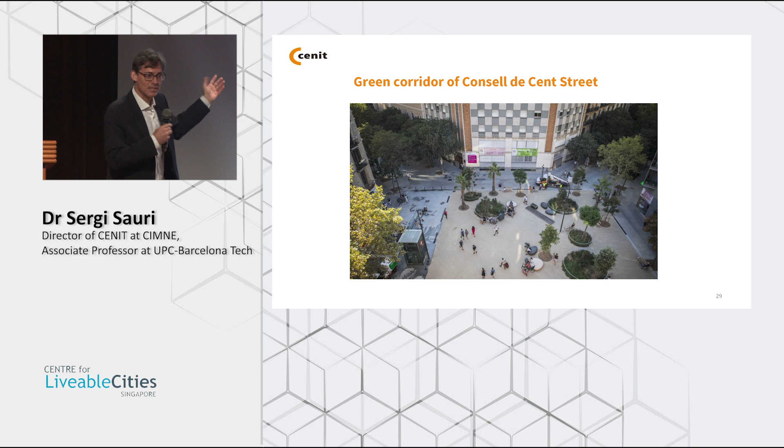So here's another example about that. Sometimes one of the challenges we'll talk about later is how you fill this space once you remove the cars—what is the best way? This is an interesting place for psychologists to work on: what are the perceptions, what is the way? As my colleague mentioned before, about making a happy city for quality of life—here the urbanization of this is a big issue related to that.

So anyway, it was not easy to implement this. The City Hall developed a community engagement and partnership, because to fill the street with life—again, it was a little bit controversial, especially the first one—the people were not used to it.

The original plan of Cerdà was just as controversial more than 100 years ago. The same type of collective that complained 100 years ago basically complains now - it's very interesting when you go back to history. So they make workshops and meetings just to share concepts, where people can say what they want. At the end of the day, they inform stakeholders about the planning to implement this solution, and they share the results - all to engage the citizens in the decision-making process.

This is the monitoring and the data we have to collect. So we're planning, and at the end of the day we're tracking the situation before and afterwards, to see the lessons. Hopefully we'll come back in the near future with more lessons learned based on real data.

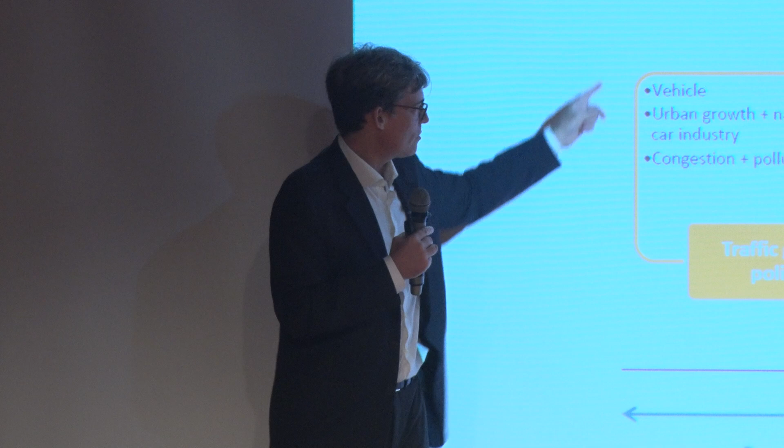Our first paradigm, as engineers, was thinking about traffic growth policies - the old engineers, traffic flow theory. We were talking about urban growth, about important national car companies. You can understand people living isolated, so the car gave you freedom, gave you accessibility. So all the cities were thinking in terms of vehicles, how to make it possible for people to move.

They have a car, they can use the car in the cities, no? That was the first paradigm. Later we realized they create a lot of congestion problems, the quality of life was not very good. So now we switch the paradigm, and we keep the traffic, we're thinking about the traffic, the same origin-destination matrices.

So we're assuming the people move in the same way, but we try that these people move in a more sustainable way. So now we're promoting public transportation, for instance, try to reduce traffic, try to put more, for instance, road pricing, and so on. But we're more in this stage now.

We're in this transition now. We're realizing this is not enough. So now we're introducing new elements in this policy. One is, for instance, bikes sharing, car sharing, but also the redefinition of the space.

So the fact is, okay, in this space, maybe we start removing cars and put pedestrians. But another aspect is when you connect and decide to change even the origin-destination matrix.

For instance, the 15-minute city, it's another level. It's thinking more in a holistic approach and thinking about livable cities. I forget mobility in some way, and I'm thinking about livable cities, how to integrate mobility in the urban planning. In fact, this 15-minute city is this approach.

So let's go to the origin-destination matrix, and let's reduce it. Sometimes we say the most sustainable mobility is the one that doesn't exist. So let's go reduce the origin-destination matrix. Let's focus on where the people have to go, how to locate the activities to make sure we reduce the vehicle kilometers or the mobility of the people.

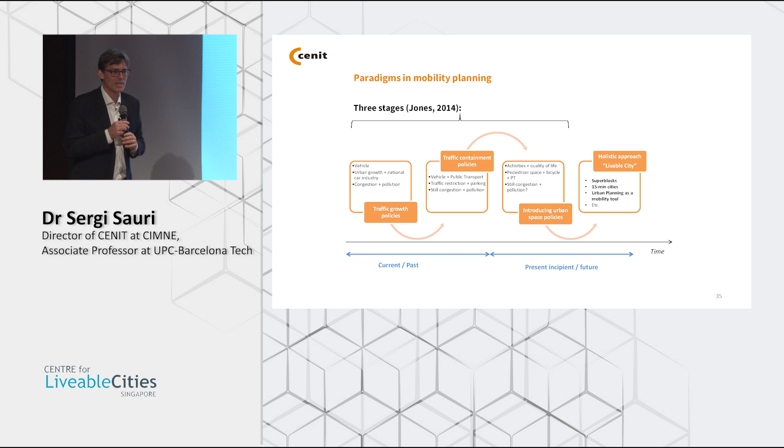So I'm thinking we're more in this step again. So many cities are in this, but I think it's very likely we'll see another. And just to finalize, we're thinking of the framework of the holistic approach of mobility. This kind of policy, like initiatives like the Superblocks, is in this way.

Here I put a phrase from almost 100 years ago. It's 100 years old, but it's very real. At the end of the day, to reduce the overcrowding traffic in Times Square, we should think about how to change the origin-destination. Again, we need to think in a bigger scale.

So we need to have a more comprehensive vision of mobility, several transport, have more a metropolitan region analysis of mobility. We need to think more in territorial planning as a mobility planning tool. In so many city halls, both perspectives are separated. They should be together, in fact. And also thinking in mobility in terms of all the value chains of resources in planning.

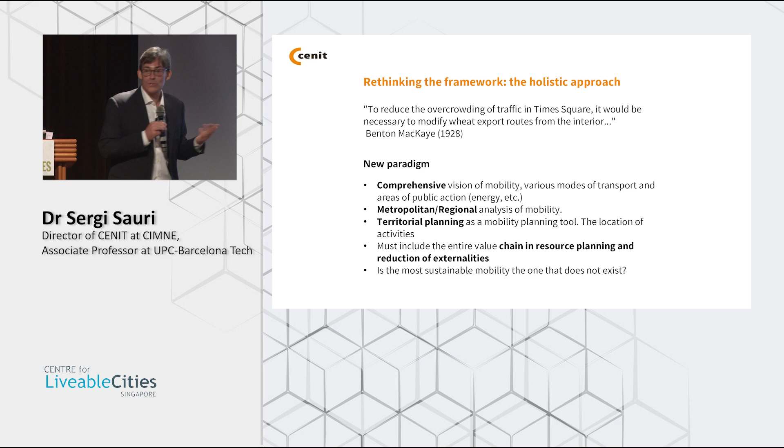And say, maybe the most sustainable mobility is the one that doesn't exist. So this is basically some of the thoughts. Thanks for your attention, and later we'll have more chance to discuss this.